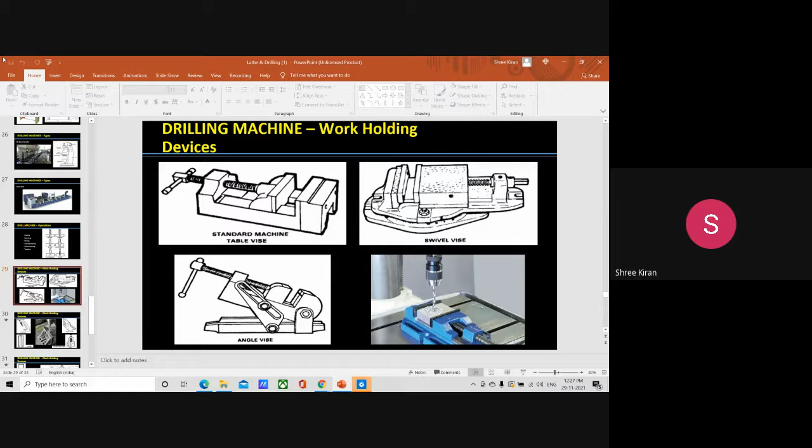Different types of vices are used for holding different types of work, for performing different operations. Now we come to the purpose of T bolts and clamps. C clamp, V clamp, and T bolts and clamps. In the case of T bolts and clamps, the workpiece can be held directly on the machine table by means of T bolts and clamps.

The top of the machine table has T slots into which the T bolts may be fitted. Now the clamps are always of mild steel. I have told the properties of mild steel, what is the purpose, what is the carbon content, and what properties we have to consider in the case of mild steel while taking it for lathe operation. All this we have discussed.

Because the clamps are made of mild steel, the clamp is made to rest horizontally on the work surface. Always, in the case of T-slots, the clamps are made to work horizontally on the workpiece by placing a suitable step block at the other end of the work. This is the main purpose for which T-bolts and clamps are used.

Now comes the V block and clamp. It is mainly used for holding cylindrical workpieces. As you can see in the figure, the work may be supported on 2 or 3 V blocks according to the length of the work. That happens in the case of V block.

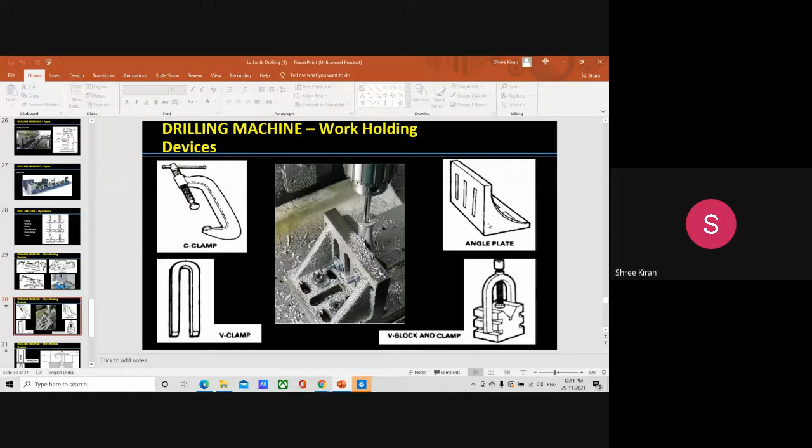Now comes the drill jigs. What do you mean by drill jigs? Drill jigs are used for mass production process. It is mainly used for mass production.

It is mainly used for mass production process. What are drill jigs? The drill jigs are mainly used for mass production process. What's the purpose? A jig is specially used to hold the workpiece securely and to guide the tool at any desired position. These are the main things of the work holding devices.

Then, after this, in terms of the size, there are various aspects of the drilling machine, mainly the specification of the drilling machine. According to the specification, the size of the drilling machine is given: the maximum size of the drill that the machine can operate, the diameter of the table, maximum travel of the spindle, number and range of spindle speeds, floor space required. All these are the major classifications and specifications of a drilling machine.

That means if you go for buying a drilling machine in a shop, you should have a basic idea of what is the maximum size of the drill that the machine can operate. Then what should be the diameter of the table which is used, then the maximum travel of the spindle. Then the numbers and ranges of spindle speeds also.

Then floor space required. Then power input. All these aspects come mainly in the case of the size of a drilling machine and specification of a drilling machine.

Now we will be discussing the various tool holding devices in the case of drilling machine. What are the various tool holding devices? The tool holding devices are used for performing different operations. They are fitted into a drill spindle by different methods. This is the drill spindle, and this is the nut.

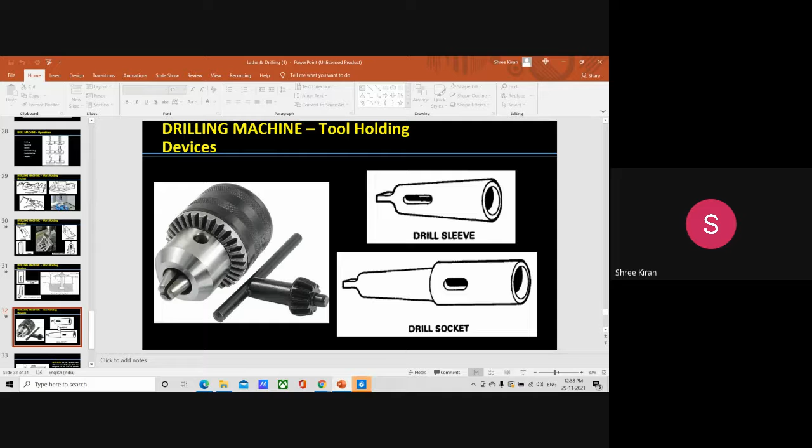So comparatively, the drill socket is much longer than the drill sleeves. It consists of a solid shank attached to the end of the cylindrical body, and the socket provides more flexibility when adapting to various taper sizes of drill shank. That is the case of the drill socket.

Then come various types like drill drifts. But before that, we can come to the drill chuck, where the spindle has been placed. The chucks are especially intended for holding smaller size drills or any other tools. This type of chuck is particularly adapted for holding tools having straight shanks. It consists of a sleeve, key, body, and jaws.

So these are the main things. The drill chucks are mainly intended for holding smaller size drills. Then this type of chuck is particularly adapted for holding tools having straight shanks.

Then the most common type of drill chuck used is the three-jaw self-centering drill chuck. Remember, three-jaw. This we have already discussed in the lathe, in the types of jaws and everything. I hope you remember. Now it comes with the tapping attachment.

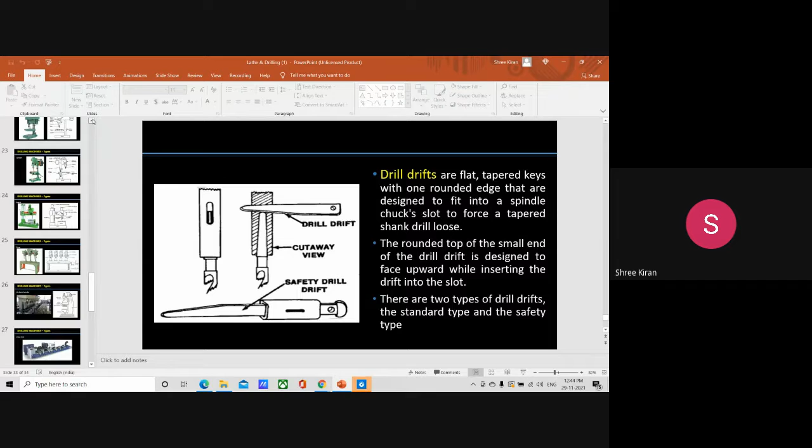So we come to the end of the topic of tool holding devices. Now we go to the drill bit nomenclature, especially in the case of drilling. Okay, so now this is the drill bit. I have told you to draw the figure previously, so you have drawn it in the notebook. You just check it out and have a look over it. Now we'll come to the drill bit nomenclature.

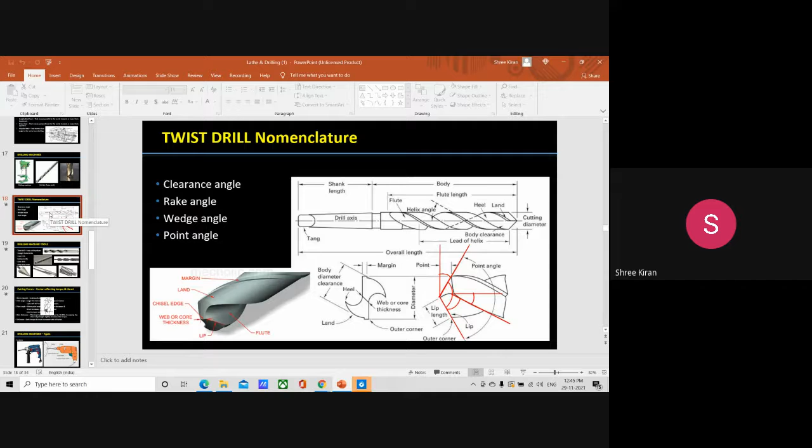So we'll firstly discuss the types and purpose of parts like body, shank, neck, land or margin, chisel edge, cutting edge, heel, point angle, helix angle, all those parts. All that I'm explaining can be seen in this figure, in the case of twist drill nomenclature. So now we will be seeing the twist drill nomenclature, the drill bit.

First one is the body, B-O-D-Y. You can see in the figure itself. The body of the twist drill has spiral grooves cut on it. You see the small grooves cut on it. What is the main purpose of the groove? The main purpose of the groove is to offer clearance to the chips formed at the cutting edge.

The body of the drill has spiral grooves cut on it, and the grooves serve to offer clearance to the chips formed at the cutting edge. They also permit the cutting fluid to spread to the cutting edges. That's what happens in the case of a twist drill. It also helps to permit the cutting fluid to spread to the cutting edges.

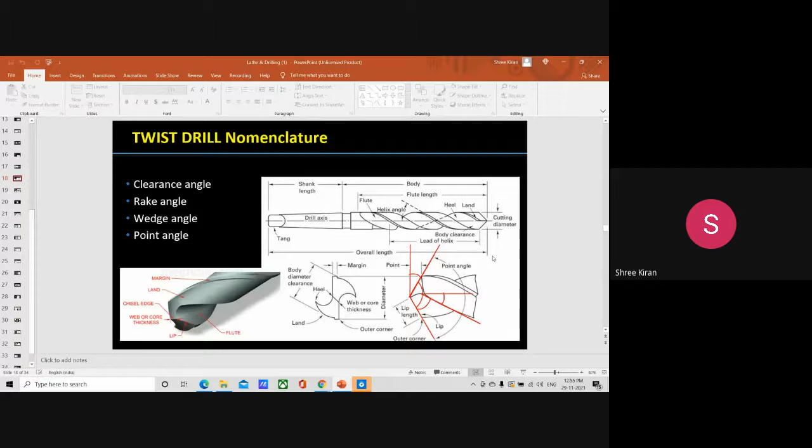Then comes the chisel edge angle. It is the obtuse angle between the chisel edge and the lip. So this is the basic idea of twist drill nomenclature. These were the various angles: clearance angle, rake angle, wedge angle, point angle, and all these angles are taken into consideration at the time of drilling operations.

Only then can it be cut to the proper dimensions required, in order to have proper drill holes. Now we have already discussed the machining time in drilling.

So what do you mean by machining time in drilling? Please look in the notes. Can anyone tell me what the aspects of machining time in drilling are? Only just 3 aspects. Any one of you? What are the machining parameters? We have already discussed them in the case of drilling itself, so I just want to know whether you have an idea.

Machining time or machining parameters we have discussed long before. In offline classes, you have written the points in your notebook. Please turn the page, you will see it. Fine, okay. Machining time in drilling: first one is cutting speed, second one is feed, third one is depth of cut. Now, can any one of you tell me the cutting speed equation?

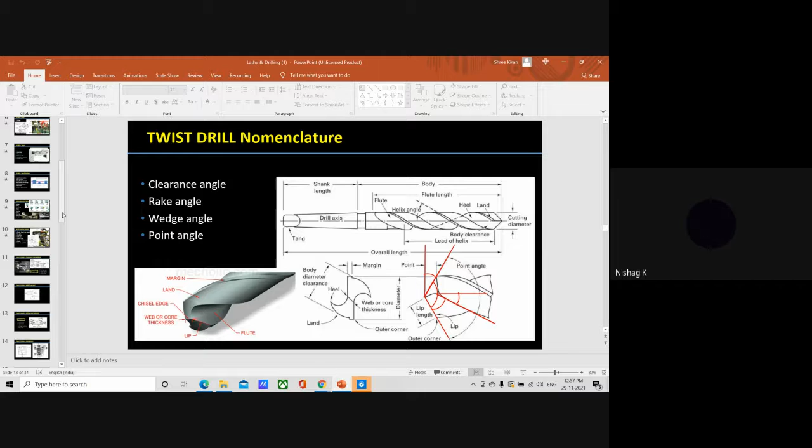V is equal to pi DN by 1000. Okay. V is equal to pi DN by 1000. Okay, that's it. Thank you. Who is it?

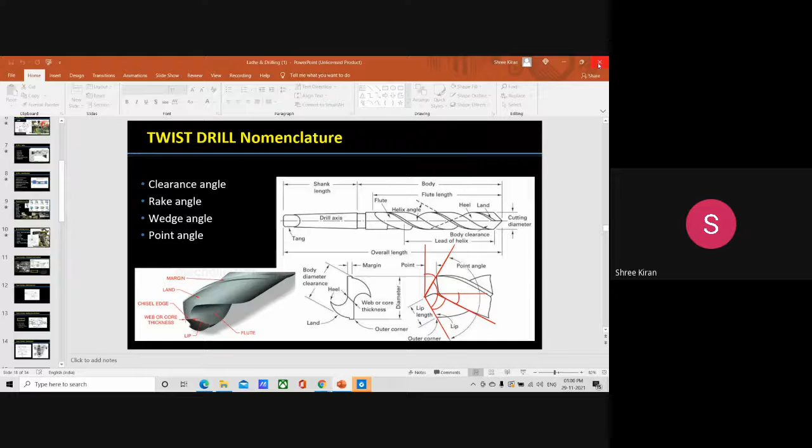So in cutting forces in drilling, mainly two forces are experienced: one is the thrust force, the second one is the torque, and it is always related to the various operations. That's what happens in cutting forces in drilling. Like this we are completing our first module as per the syllabus.